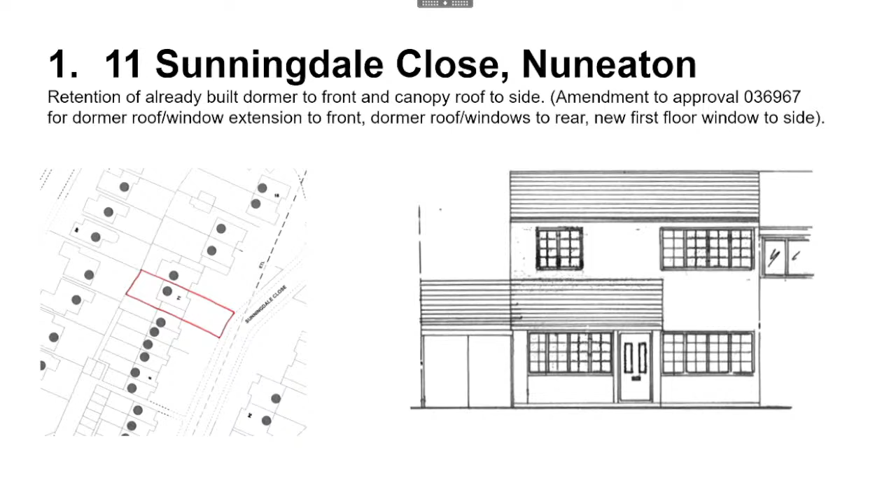The amendments are, in terms of the front dormer: this has been built 20 centimetres higher and 35 centimetres wider than the previously approved dormer. A canopy roof was added to continue the existing canopy roof across the front over the existing carport. That element wasn't shown on the original application.

The application was deferred at committee on the 7th of September in order for members to carry out a site visit to assess the impact of the dormer and canopy roof on the street scene, and that was carried out earlier this afternoon. Objections have been raised, citing issues such as the property no longer being in keeping with the area, with larger windows and being finished partly in render.

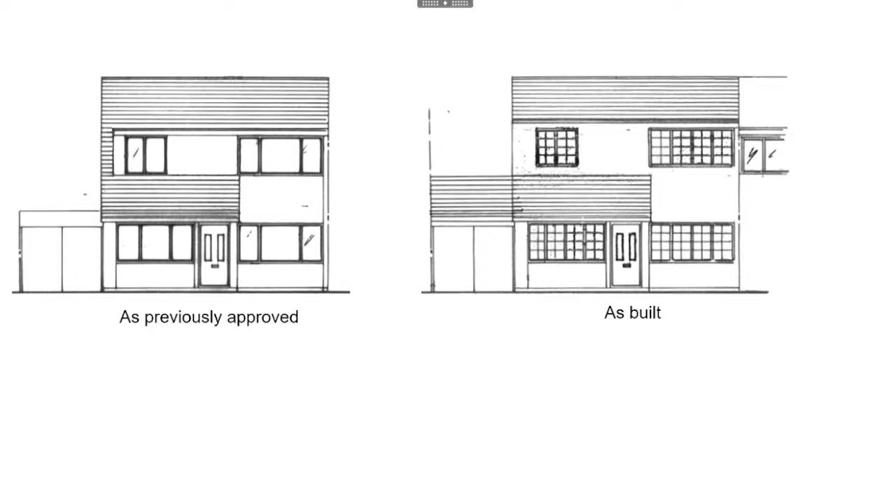In terms of the impact on visual amenity, both elements are visible from the street. The overall increase in the size of the dormer from that originally approved is comparatively small. The dormer is set below the existing ridgeline of the main house, and the property is set back from the footpath by approximately 13 metres. The canopy roof is a continuation of the original. As there is a mixture of house styles in the street, officers consider that it would be unreasonable to refuse

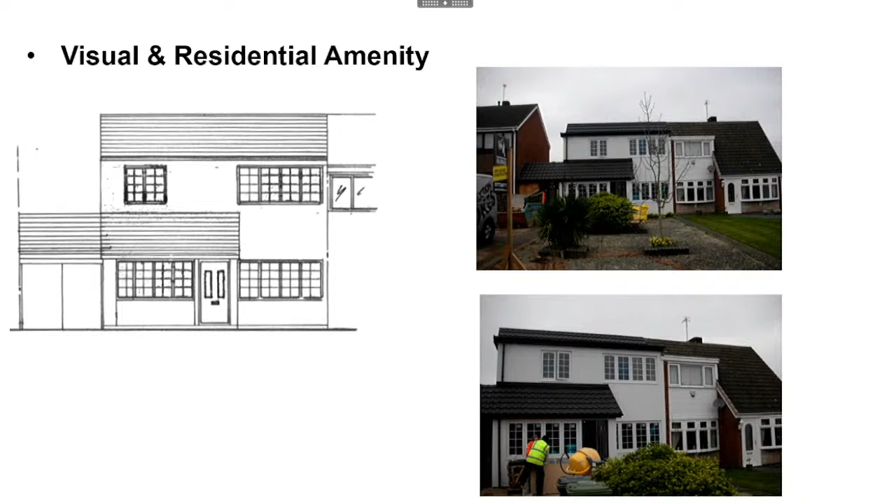the application on visual amenity grounds. In relation to the impact on residential amenity, as the dormer and canopy roof are to the front, only the neighbouring properties either side, which are numbers 10 and 12, are likely to be impacted on. Neither element infringes either the 45 or 60-degree guideline from the centre of any front-facing windows of habitable rooms, and

therefore it is considered there is no detrimental impact on neighbouring properties. It is therefore considered that the proposal is acceptable in terms of visual and residential amenity, and the recommendation is one of approval. Thank you, Chair.

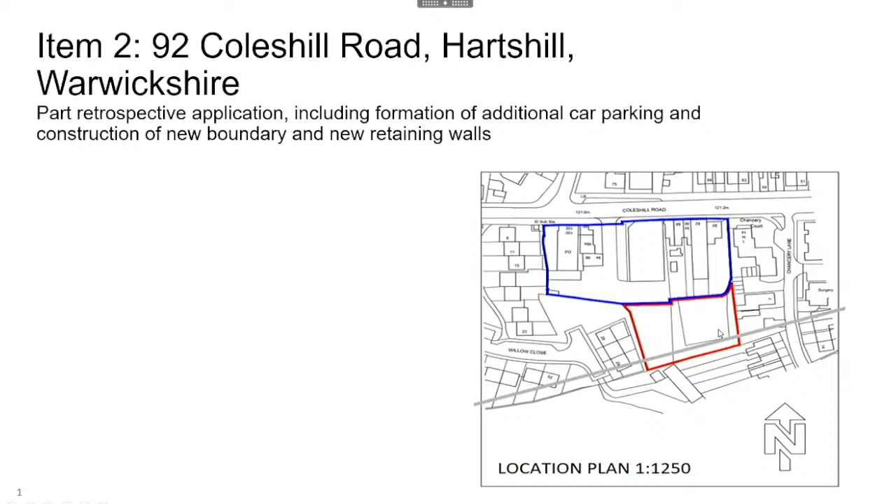The key issues to assess in this consideration of this application are the principle of the development, the impact on residential amenity, the impact on visual amenity, flooding and drainage, and the impact on highway safety.

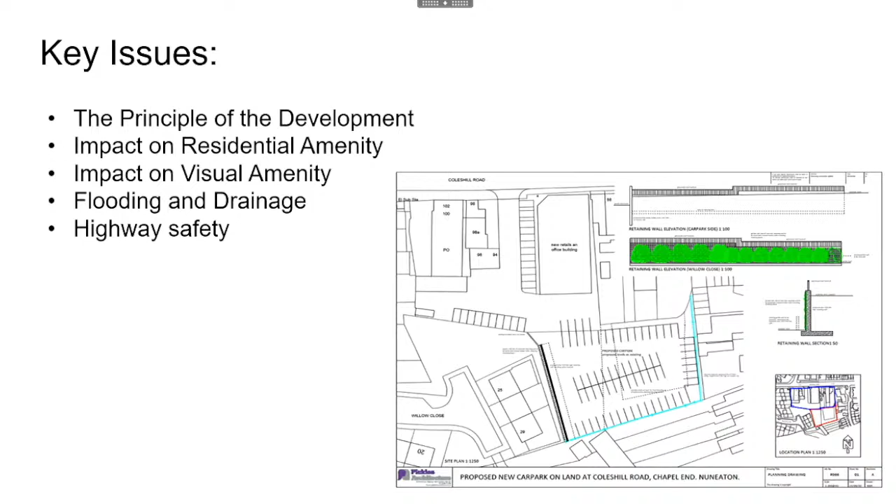Just to be clear, the majority of this development is not within our area, and just the southern tip of the site is. A lot of the works have already been carried out, with some of the works being proposed and continuing to be built. The proposed end use of the portion within NBBC's area is as a car parking area. The boundary wall and fencing are ancillary to this use, and therefore the principle, at least, of the proposal is acceptable.

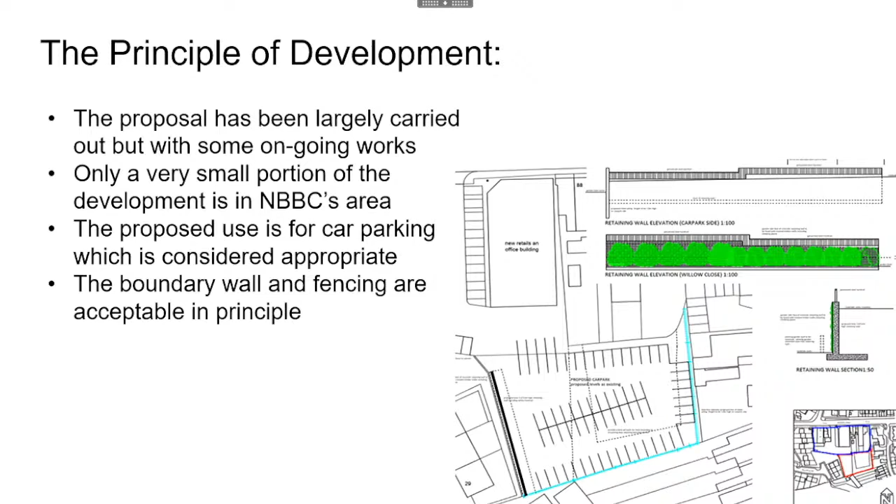The land levels have been raised by around 2 metres, and there is a further 2.4 metre fence on top of that. 11 Chancery Lane is the property which has its rear garden running parallel to the new boundary fence. The fence will provide some privacy and will help to mitigate any noise issues created by the car park, but will have a significant enclosing effect on the rear garden of Chancery Lane.

There are lighting columns also proposed, and a condition has been recommended by Environmental Health to cover these. On balance though, given the open aspects to the garden, the harm to the private rear garden of this Chancery Lane property is considered not to be so significant so as to warrant refusal.

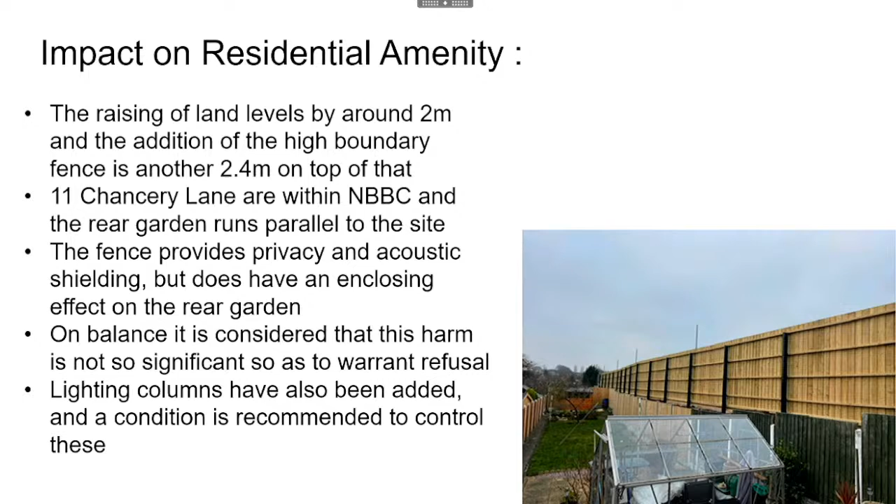The new boundaries are concrete retaining walls with high, close-boarded wooden fences. The large wooden fences are highly noticeable from the rear gardens on Chancery Lane. There is some harm to visual amenity of this part of the borough as a result of the works. However, this harm is isolated to only small parts of the public realm, with private gardens mostly affected. However, it is not considered that this harm is so severe so as to warrant refusal.

In regard to the impact on flooding, which was raised by some objectors, the majority of the site is within North Warwickshire, and very little of the built form is in our area. It is not within NBBC's area, but large surface water storage tanks have been installed within North Warwickshire's part of the site, which they considered to be acceptable. It is considered that the part of the site on us will have no significant adverse effect on flooding or surface water drainage.

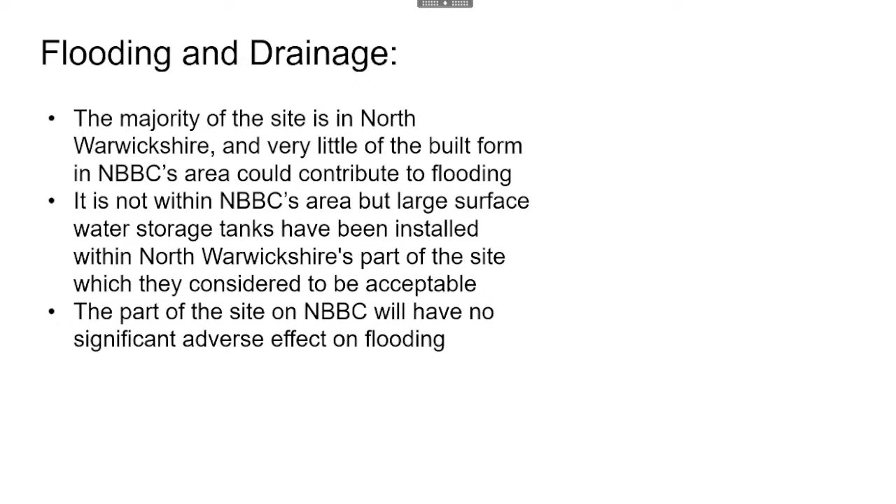The access and manoeuvring space to the site is all within North Warwickshire's area. Warwickshire County Council highways were consulted on the scheme, and they have no objection subject to some conditions. Additionally, on the larger part of the site, North Warwickshire required a road safety audit to be submitted before the approval of the scheme.

This was submitted and scrutinised by Warwickshire County Council and deemed acceptable by North Warwickshire. It is considered that the harm to highway safety caused by the development within this borough is minimal and is acceptable with the conditions proposed. In conclusion, and on balance, the development is considered to be acceptable. Thank you, Chair.

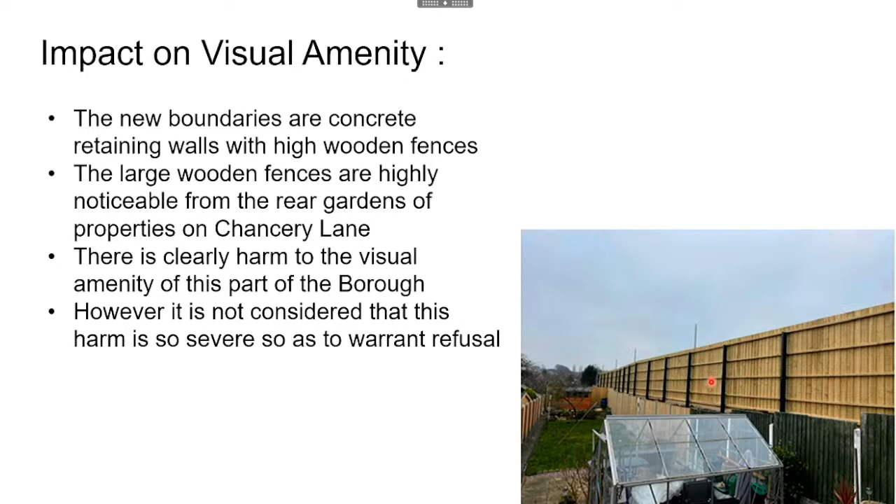Yeah, that's absolutely fine. I'll just change my pointer. This part of the site is on Nuneaton and Bedworth Borough Council. The boundary runs roughly parallel to the southern boundary of the site, which hopefully you can see there. As I move back through the slides, this fence is that southern boundary that I just highlighted. So hopefully that's answered the question, Councillor, and hopefully that's clearer. Thank you, Chair. Thank you.

Councillor Evans. Thank you, Chair. I just wanted to ask a question in relation to Schedule 4 about the car park not being used after 10:30 in the evening. How would we enforce that as a planning authority? Because I don't see a condition in there that some sort of barrier is put in place, like a gate that the future facility would put down after 10:30. So it would still be an open car park, surely.

That's correct, Chair. The actual access to the site isn't on us, so we couldn't enforce any condition that was for a barrier or related to the access. The use of the car parking that's on us is proposed to be limited by conditions, and that would be down to basically it being used outside of those hours, which is a breach of condition, which we could then investigate should enforcement complaints be raised. But there would be no physical barrier that we could place on that site.

Thank you. Councillor, does that answer your question? Yeah. So you say we can't put a condition in place that we mandate the applicant to put a gate or barrier in place to operate between 10:30 and 6:30. Is that what you're saying? Yeah.

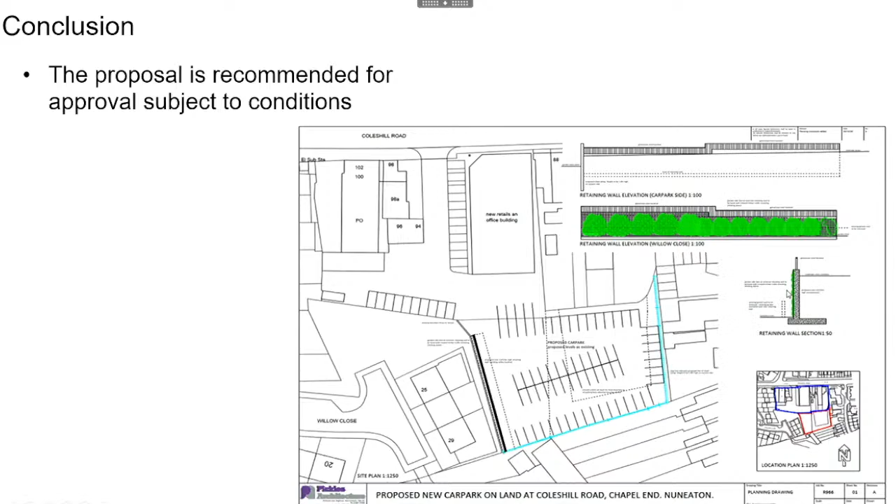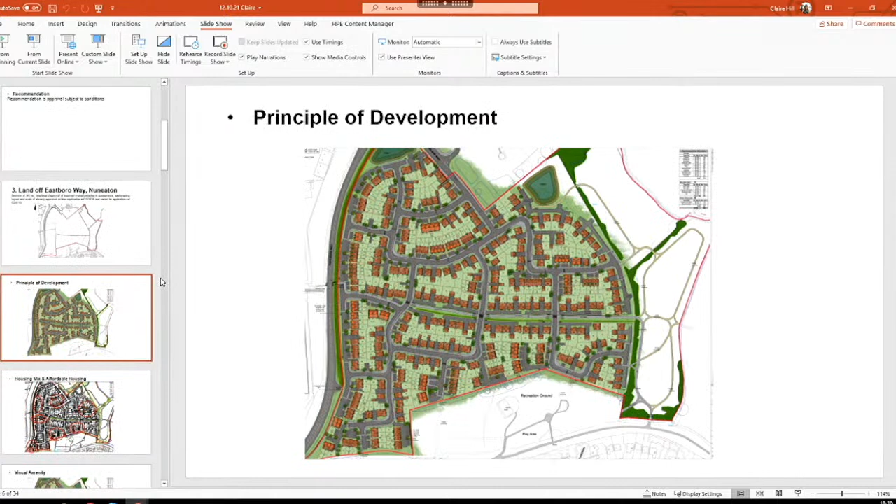Okay, so we'll move now to agenda item number 3. I understand we've got several speakers, so just before we start, I will remind speakers that once the presentation is over, you'll be allowed 3 minutes to make your point. That will be timed. We've got several speakers, I think 2 of them are statements which will be read out by Mr. Richardson, and then we've got a speaker on behalf of the applicants. Claire, whenever you're ready.

This application is for approval of reserved matters for the erection of 360 dwellings relating to appearance, landscaping, layout and scale of an already approved outline application. The outline application established the acceptability of the principle of the development, and this current application deals with the details of the scheme. A mixture of 1 to 5 bedroom properties are proposed, including affordable housing. Public open space and infrastructure such as footpaths and cycleways are also proposed.

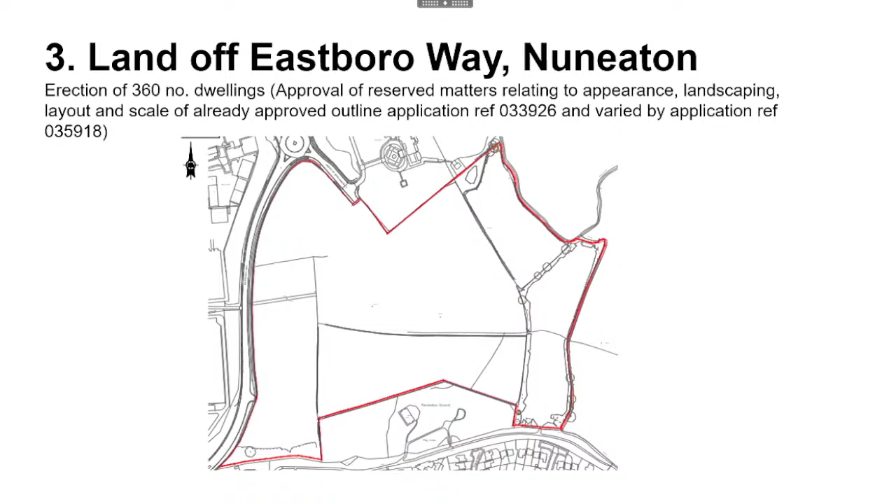Objections have been received as detailed on the agenda, raising points such as increased traffic and congestion and the need for sufficient pedestrian and cycle routes. 2 letters of support have also been received. Notwithstanding the comments received, the application is also being reported to committee at the request of Councillor Kondakor.

In terms of the principle of the development, this has been established through approval of the outline application. Policy DS2 of the Borough Plan sets out the hierarchy and roles for each settlement in the borough, with Nuneaton having the primary role for employment, housing, leisure and service provision. Policy DS5 of the Borough Plan refers to a number of sites that will be allocated for residential development and associated infrastructure, and this application forms part of allocation HSG 10.

This sets out the key development principles and expected form of development. Officers consider that the requirements of policy HSG 10 have been accommodated on the site. An illustrative master plan was submitted with the outline application, and it is considered that the reserved matters is in general accordance with that.

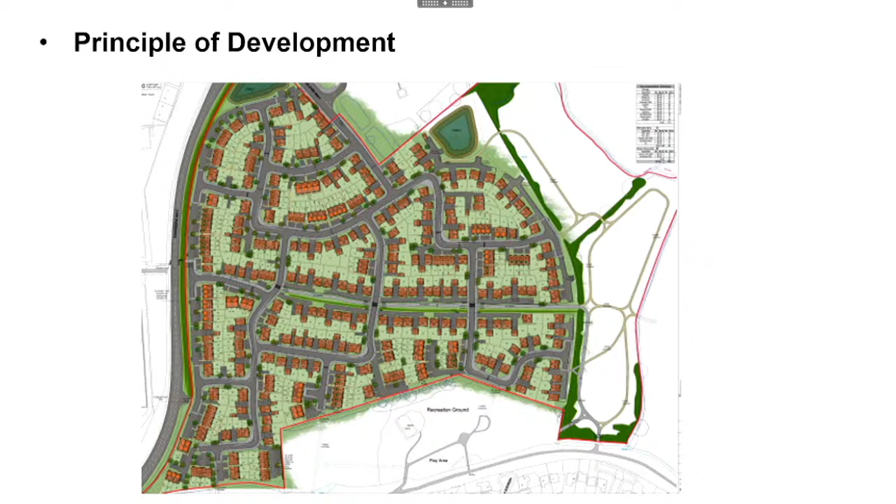In relation to housing mix and housing needs, including affordable housing, Policy H2 of the Borough Plan requires 25% of all new developments to be affordable on sites of 15 dwellings or more. A total of 90 affordable units are proposed, which equates to 25% and is therefore acceptable. Of the affordable units, 24 are 1 bed, 40 are 2 bed, 20 are 3 bed and 6 are 4 bed. The housing team have confirmed they have no objection to this mix. The Affordable Housing SPD recommends a split of 74% social affordable rent to 26% intermediate housing mix.

The proposed tenure split is 73% affordable rented and 27% shared ownership. Planning policy have confirmed that as this is close to the requirement, it is considered acceptable.

The Affordable Housing SPD states that to promote inclusive communities, affordable housing should not be identifiable from other forms of housing within a housing development. It should not be located in the least desirable areas of the site, but distributed evenly amongst market housing.

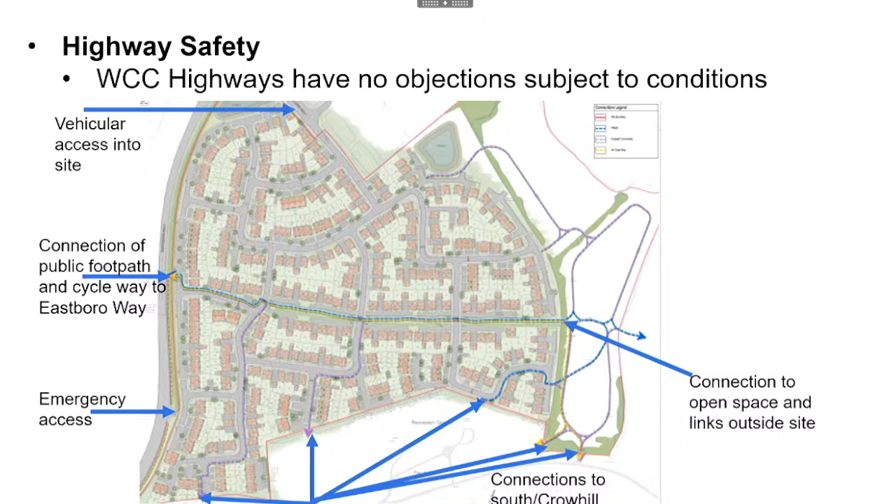In relation to flooding and drainage, the majority of the site is within flood zone 1. The north-east part of the site is located within flood zones 2 and 3, with the River Anker and a small tributary watercourse adjoining the site. As the built development will be entirely within flood zone 1, the Environment Agency do not have any objection.

In terms of surface water drainage, as per the outline application, sustainable urban drainage systems are proposed, one to the north-east and one to the north-west, together with supplementary attenuation tanks. There is a condition on the outline permission that requires full details of the foul and surface water drainage schemes to be submitted for approval.

Revised surface water drainage calculations have been submitted, which the County Flood Risk Team have confirmed are acceptable.

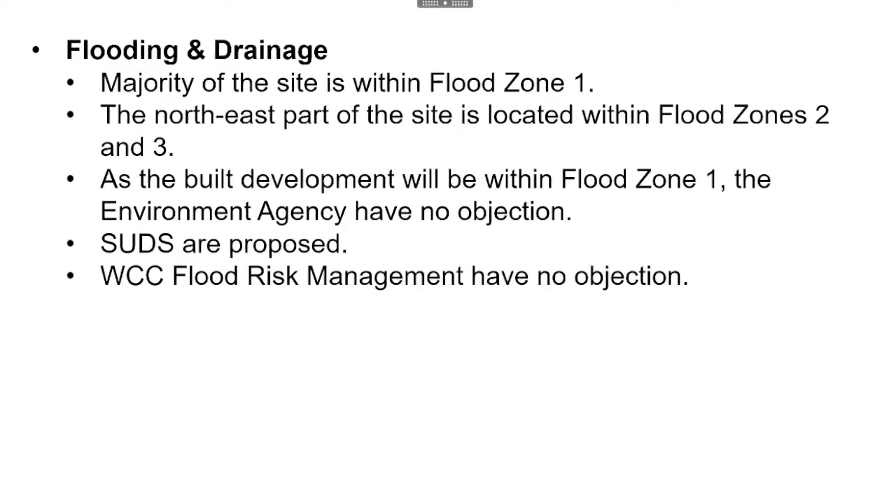In terms of ecology and biodiversity, the new public open space to be provided within the site will retain the existing grassland, hedgerow and tree features and will include meadow grassland and an enhanced ecological area towards the northern end with additional planting. A wet grass mix is also proposed to the very northern end of the open space.

Three scrapes are proposed to the northern meadow area. These are shallow ponds which hold rain or flood water seasonally and which remain damp for much of the year. They have gently sloping edges which create obvious water features in fields and can make a significant difference to wildlife.

Condition E has been added for further details of these to be submitted. The Parks team have also requested a condition for details to be submitted of how the SUDS basins are to maximise their benefit for wildlife. This is covered in condition C.

An arboricultural method statement has been submitted for the application. This identifies that the majority of the existing trees and hedges would be retained. Some trees are proposed to be removed from the southwest corner of the site and other parts of the site to allow for footpath connectivity. The majority of these are category C and are of lower quality.

The loss of some existing trees is mitigated by a new planting scheme. A new length of native hedgerow is proposed to the front of plots 296 to 298 to the south of the site.

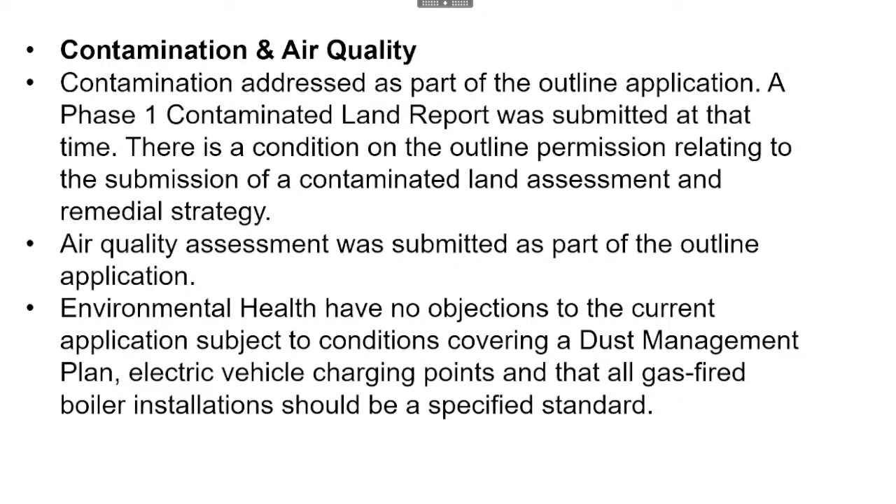Since the production of that report and determining the outline application, an air quality SPD has been adopted by the Council. Environmental Health have no objections to the current application, but have requested conditions covering a dust management plan, electric vehicle charging points, and that all gas-fired boiler installations should be to a specified standard.

In conclusion, the site is allocated as a strategic housing site in the Borough Plan and will provide housing and other social and leisure facilities. The potential impacts of the development in relation to residential amenity, visual amenity, highway safety, flood risk and drainage, contamination, air quality and ecology have all been considered.

The assessment has subsequently shown there will be no adverse impacts in some instances. Where there are potential adverse impacts, it would be possible to mitigate these through the use of conditions. The recommendation is therefore approval, subject to conditions, as detailed on the agenda and addendum.

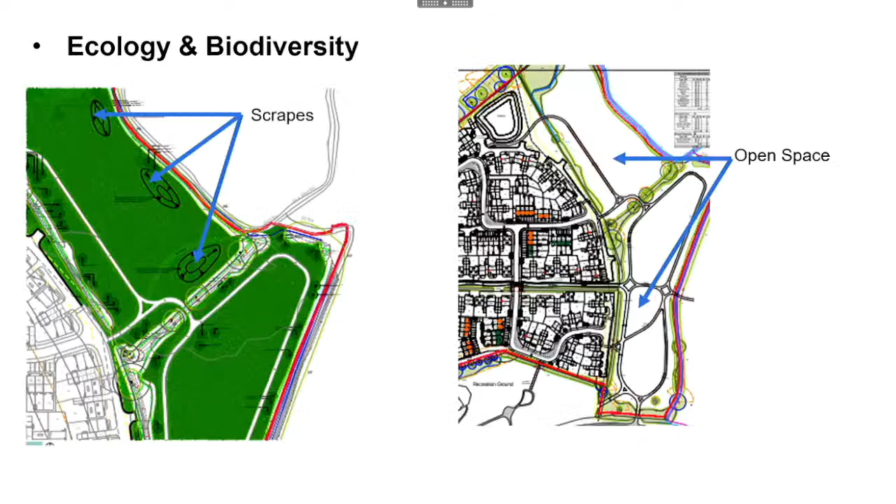The distance standards within the residential amenity for a new site, there's nothing on there. I would have thought a little bit more thought would have gone into ensuring the houses aren't overlooked. You know, they've got French windows in so people can see past them. I mean, it's a real blank canvas and a really good opportunity to make a really good housing estate. And I really don't think it fits my criteria for that at all.

I am unhappy about how the pepper potting hasn't been done. And in terms of only 119 houses out of 360 will be built so that they can be used for lifetime or used for adaptations, I don't know whether the officer knows how many of those that are in the affordable category fall into that 119. So if the officer could maybe find that out for me, that'd be useful.

And it just doesn't sit right with me. I think it's badly designed, and at this moment in time, I will listen to the debate. I haven't made my mind up. Thank you, Chair. Okay, thank you, Councillor Shepherd. Councillor Wilson.

Thank you, Chair. This is in my ward, so it's only appropriate, I think, that I get a chance to comment. I've never really liked the principle of having development on this site, but it was put in there under the previous administration with the borough plan. It was passed by the inspector, and a previous planning committee before May, I think it was 2018.

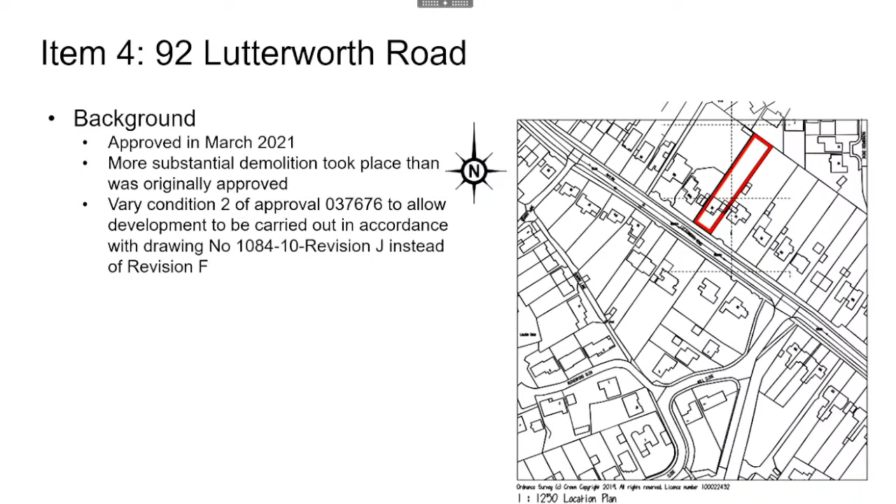The two key issues to consider are the impact on visual amenity and the impact on residential amenity. The proposal will be visible within the street scene of Lutterworth Road. The front elevation is set back from the footpath, consistent with its neighbouring houses. The design reflects the traditional style of the area and features a hipped roof with painted render finish. This replicates the overall style and size of that already previously approved.

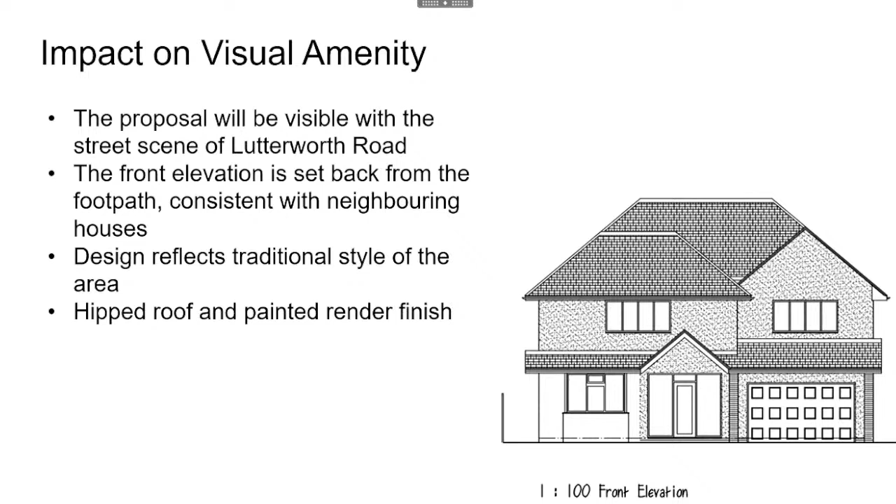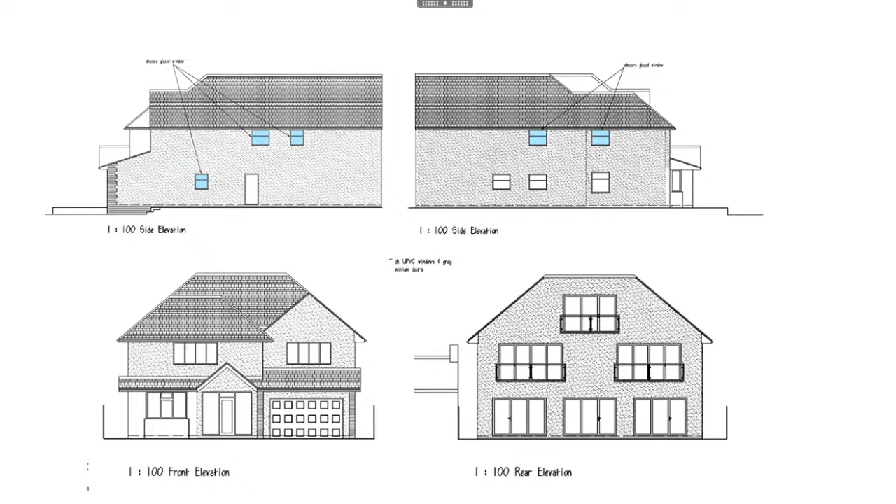Here are the elevations. Members will note that the majority of the building will be new, so to speak, with only a small bit of the original dwelling remaining, and essentially that's the crux of why this application is being made. But these elevations are identical to those previously approved.

The proposal property has two other houses either side, 94 Lutterworth Road to the southeast and 90a Lutterworth Road to the northwest, with number 9 Leam Close to the rear of the site. The proposal has been assessed against the adopted Sustainable Design and Construction SPD, and overall it is considered there will be no unacceptable harm on residential amenity.

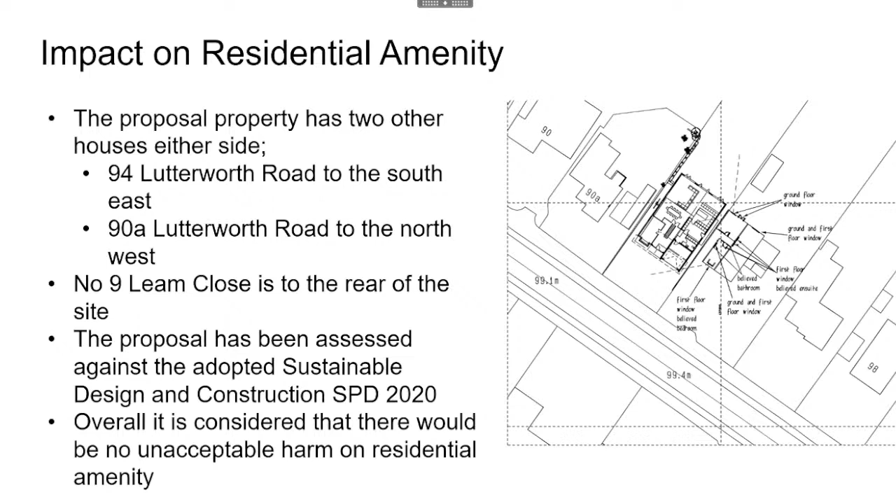The two key issues are visual amenity and residential amenity, and overall it is considered that there will be no unacceptable harm to either of these caused by the development. The recommendation is therefore one of approval, subject to conditions. Thanks, Chair.

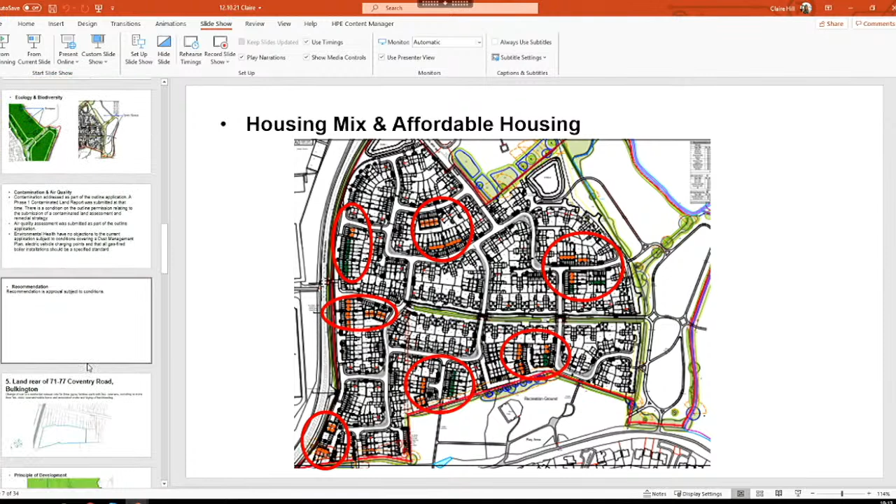This application is for a change of use to a residential caravan site for 3 Gypsy families with 2 caravans on each pitch. These would include no more than 1 static caravan and associated works and laying of hard standing. Objections have been received as detailed on the agenda, raising issues such as inappropriate development in the green belt, loss of openness in the green belt, loss of privacy, increased noise and impact on highway safety.

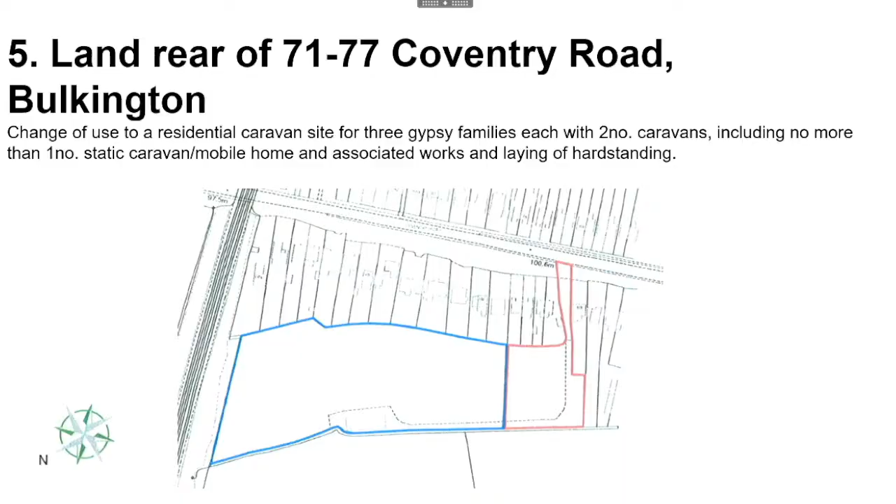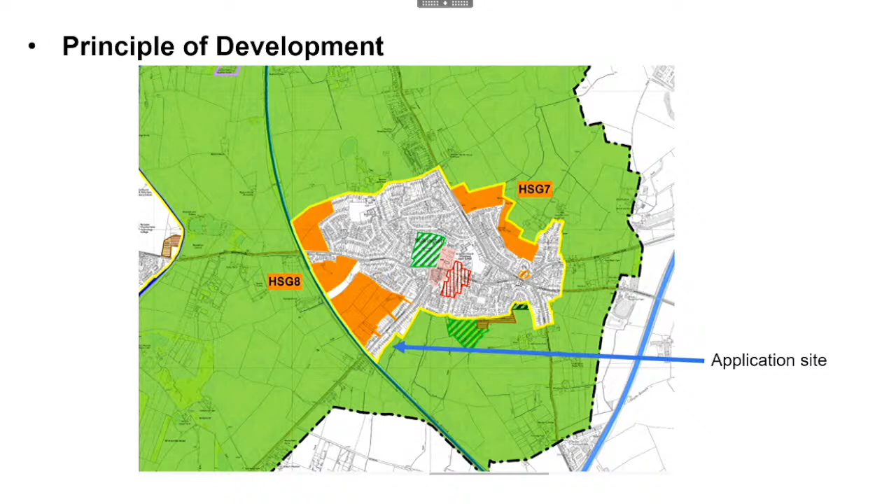In terms of the principle of development, policy DS3 of the Borough Plan states that development outside settlement boundaries is limited to agriculture, forestry, leisure and other uses that can be demonstrated to require a location outside of settlement boundary. This site is not within a defined settlement boundary as shown yellow on the plan green, and therefore it is not considered that the principle of the development is acceptable.

The application site lies within the West Midlands Green Belt, where in line with paragraphs 147 and 149 of the NPPF, policy DS7 of the Borough Plan makes it clear that there is a general presumption against inappropriate development, which, by definition, is harmful to the green belt. Paragraph 150 of the NPPF sets out certain types of development which are acceptable within the green belt, with paragraph 149 stating that new buildings within the green belt are inappropriate, except in certain circumstances.

The proposed change of use of the land to a residential caravan site does not fall within any of the exemptions outlined in these policies, and is therefore a form of inappropriate development. This inappropriateness is also reiterated in paragraph 16 of planning policy for traveller sites. The development should therefore not be approved except in very special circumstances, and substantial weight should be given to any harm to the green belt by reason of inappropriateness.

In terms of the impact on the openness of the green belt, paragraph 137 of the NPPF states that the fundamental aim of green belt policy is to prevent urban sprawl by keeping land permanently open, and that the essential characteristics of green belts are their openness and permanence. The site is ultimately an open area of green space field bounded by mature hedging in part to the rear of the existing established residential rear private gardens of properties along Coventry Road.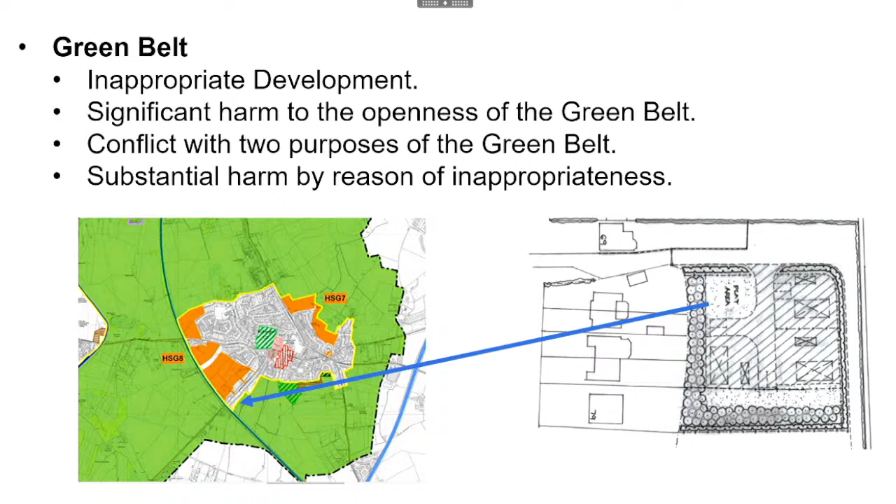Paragraph 148 of the NPPF states that when considering any planning application, local planning authorities should ensure that substantial weight is given to any harm to the green belt. Very special circumstances will not exist unless the potential harm to the green belt, by reason of inappropriateness, and any other harm is clearly outweighed by other considerations.

In this case, some considerations have been put forward by the agent, which they believe amount to very special circumstances which outweigh the harm to the green belt. These will be covered in turn next.

The first is unmet need. Planning policy for traveller sites requires local authorities to consider the existing level of provision and need for sites, and that local authorities should identify and update annually a supply of specific deliverable sites sufficient to provide...

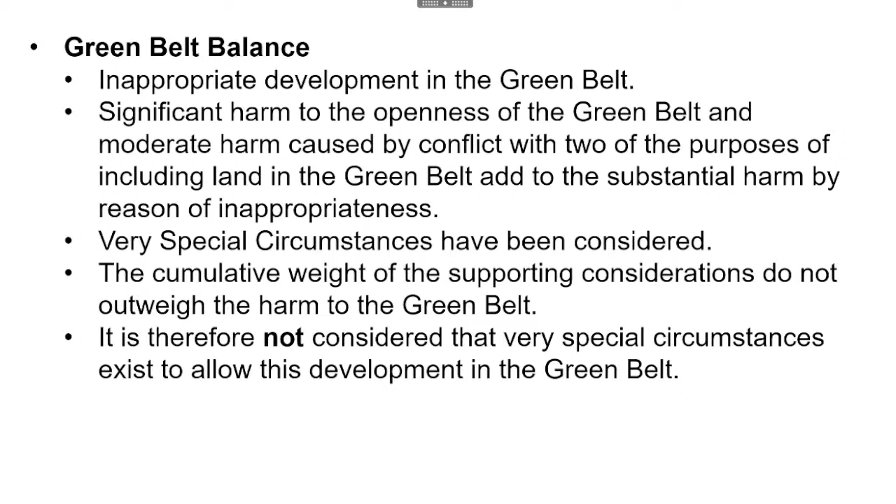However, whilst the best interests of the children are a primary consideration, officers don't consider they are a determining factor. The cumulative weight of the supporting considerations do not outweigh the harm to the greenbelt, and therefore it is not considered that very special circumstances exist to allow this development in the greenbelt.

Turning to residential amenity, the rear of numbers 71 to 77 Coventry Road are the closest properties to the site. A static caravan is proposed to the western part of the site, which would be sited approximately 30 metres away, which does comply with distance standards. It is therefore not considered that there will be any significant overlooking from and to the site.

Environmental Health have been consulted but have not responded. However, they had no objections in relation to the impact on surrounding properties to the previous application, which was for the creation of 3 residential units. They also stated that as the site is approximately 250 metres from the railway and set well back from the road, they were not concerned about noise impacting the site.

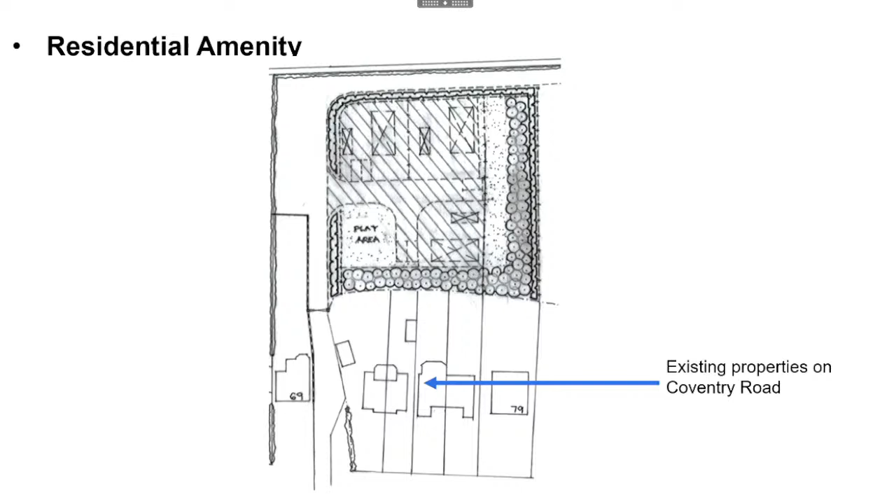In relation to visual amenity, the NPPF states that planning policies and decisions should ensure that developments are sympathetic to local character and history, including the surrounding built environment and landscape setting. Policy BE3 of the Borough Plan states that all development proposals must contribute to local distinctiveness and character.

The site is located to the rear of properties fronting Coventry Road, which is currently of a uniform linear formation, which would be considered ribbon development. The caravan site will be located to the rear of the properties and therefore constitute backland development. Officers consider that the proposed development would depart from the existing characteristics of the area, street scene and built form, contrary to the visual amenities of the area.

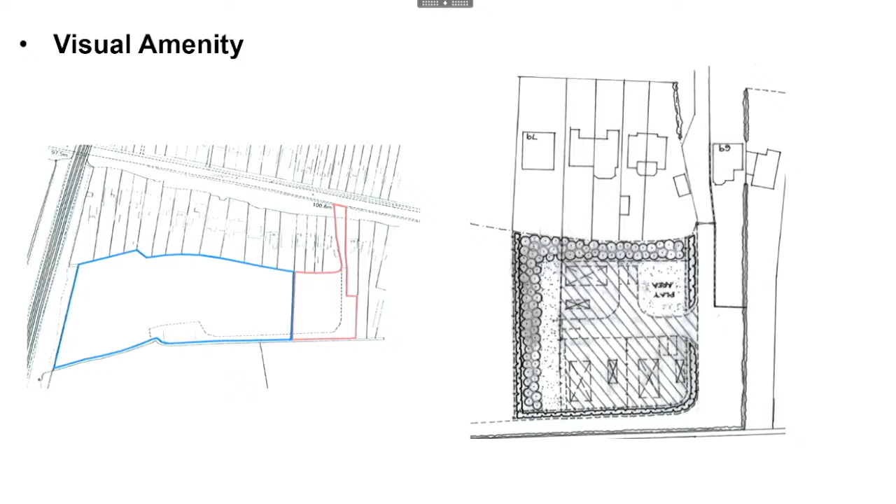In terms of highway safety, the NPPF states that it should be ensured that safe and suitable access to the site can be achieved. Access is proposed off Coventry Road between numbers 69 and 71. County highways have no objection, subject to conditions.

In relation to flooding, the site is within flood zone 1, which has the lowest possibility of flooding, and drainage details could be secured through a condition.

In terms of archaeology, it would appear that the proposal may have an impact upon a small area of ridge and furrow. However, this is a small part of what itself is a relatively small and isolated fragment of ridge and furrow. Warwickshire County Council Archaeology have been consulted and stated that some of the hard standing that was previously laid would have had some impact on the surviving earthworks. However, there is very little in terms of what is known about the archaeological sites and the surrounding area, and this proposal is unlikely to have significant impacts, and therefore they have no objection.

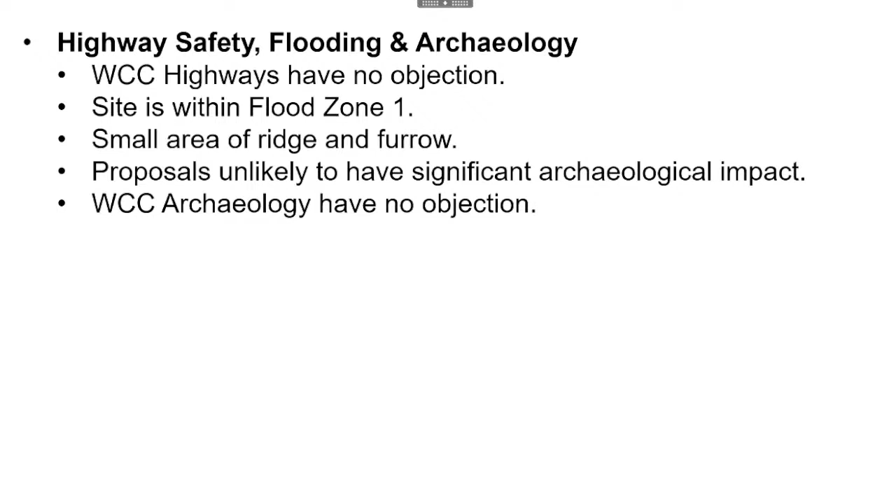In conclusion, the proposed development is a form of inappropriate development in the greenbelt. Development should therefore not be approved without very special circumstances. It is considered that the significant harm to the openness of the greenbelt and the moderate harm of conflict caused by the conflict of two of the purposes add to the substantial harm by reason of inappropriateness.

Very special circumstances should be demonstrated to justify the inappropriate development. In this respect, the very special circumstances are unmet need, lack of accommodation, compliance with policy, and the personal circumstances of the occupants.

The cumulative weight of the supporting considerations do not outweigh the harm to the greenbelt. It is therefore not considered that very special circumstances exist to allow development in the greenbelt. In addition, the site is outside a recognised settlement boundary and will depart from the existing linear form of development. The recommendation is therefore refusal as detailed on the agenda.

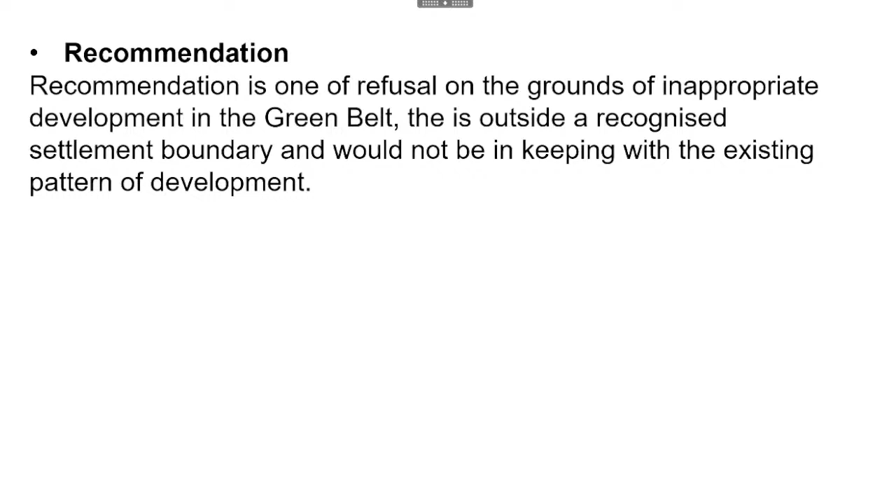So I do understand that. But could you tell me, please, when you were just on about the property and building down Coventry Road, you said I got full planning permission 3 years ago for that land where I'm building the houses. Didn't you realise that?

Mr. Smith, I'm not at liberty to discuss this further, because we've finished the item now. But if you put things in writing to the council, if you're not happy with anything, or if you want to go to appeal, you're more than welcome to do so. It's your prerogative. So I'm sorry, I'm not discussing this item any further, Mr. Smith.

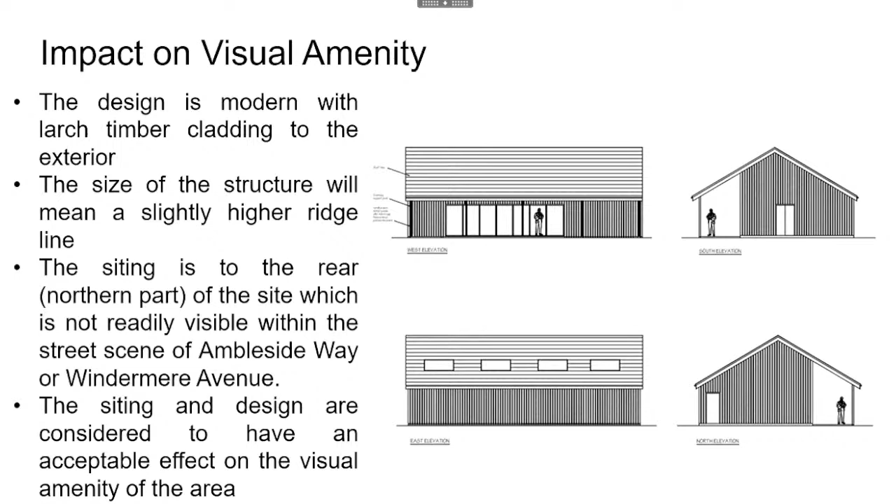The pavilion is to be sited around 40 metres from the nearest residential garden. Because of this siting away from gardens, there are no concerns over the loss of light or privacy. There are some roof light windows in the rear roof slope, but again this will meet distance standards given the distances involved. Environmental Health have requested a condition to prevent amplified sound, which will be added to any approval and is on the agenda.

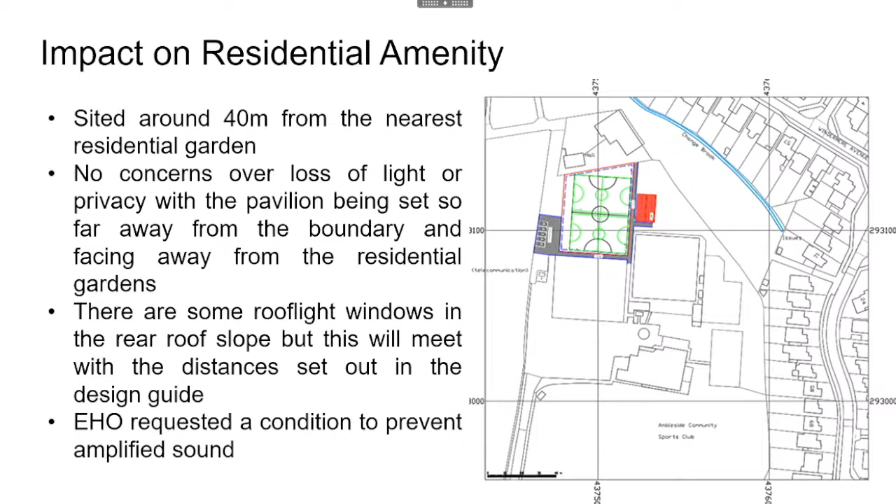Thank you, Chair. Thank you very much. I have one speaker on this item, that's Councillor Tromans, I believe. Oh, sorry, my apologies, and Mr. Carr. I think it's conventional that we go with you. You're indicated first, Councillor Tromans, then we'll go to Mr. Carr.

Thank you very much, Chair. I'm speaking as ward councillor, not as an objector or as a supporter, but just reflecting the comments I've had from both the applicant and the residents. Ambleside is a very valuable amenity in Nuneaton and across the whole borough. They get users from everywhere, in Bedworth, Bulkington and Nuneaton. In our area, with all the expansion we're having with new homes, it's very, very needed.

I can well understand that they want to improve the amenities there. And the design of the pavilion itself seems to be very modest and in keeping, and has been deliberately done so that it won't cause problems to the local residents. I'm glad that Ambleside are considering these things.

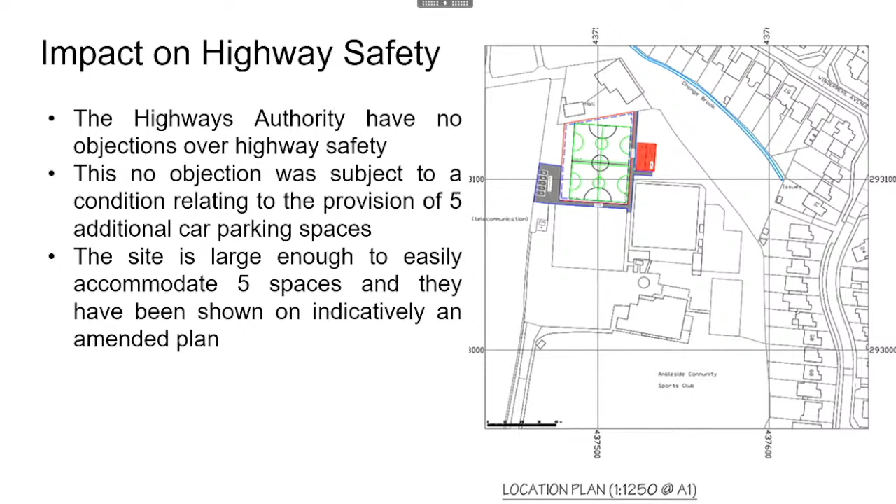We're going to have an improved amenity there at Ambleside, which is very welcome, and I think we would also be doing right by the residents, and they would be being good neighbours by putting up the acoustic boarding, the other side of which there'll be a bit of a hedge just down the slope, so that will break up the impact of the boarding.

So actually it will look quite nice from residents' back gardens, and they won't be disturbed by direct noise that in some places isn't really any further apart than the width of this room. So thank you, that's all I wanted to say, Chair.

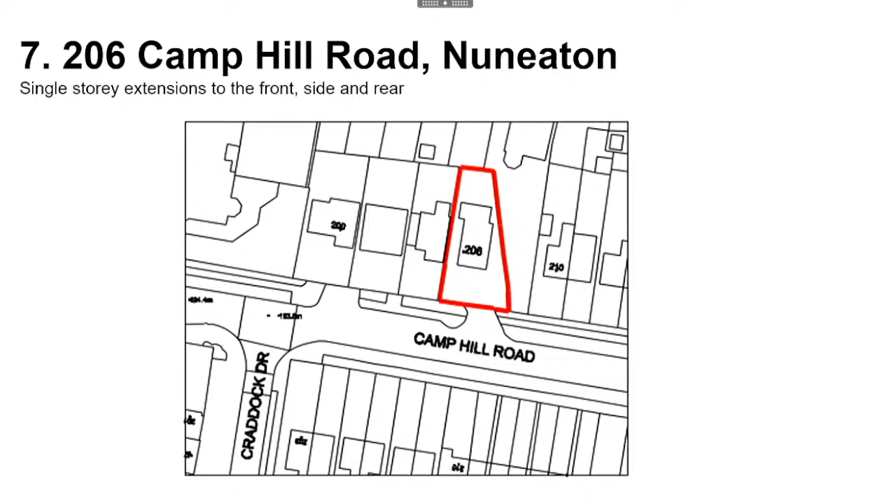In terms of residential amenity, there are a number of properties that surround the site. In terms of number 204 Camp Hill Road, the proposed single-storey side extension appears to be proposed up to the boundary with that property. The gutter detailing has been amended to show this is a parapet wall, so it does not overhang this neighbouring property. The only window to the side of this neighbour is to a landing, which is not protected. The neighbour has raised concerns as the gap to the side of this neighbour is relatively small, and they have meter cupboards and utilities on this side of their property. So access would be required. However, this is not a planning issue. It is considered that this side extension would not affect any front or rear windows or their private amenity space.

At the moment, the current single-storey rear extension to the dentist projects slightly further than that neighbour's conservatory - that's the extension there that's existing. The proposed single-storey rear extension is to project to a further depth of 3.1 metres. However, as it will be set off the boundary by 4.5 metres, this is considered acceptable.

In terms of the impact of number 6, the single-storey side extension will be 26 metres from the rear windows of this property, which complies with distance standards. In relation to the rear extension, this is only slightly in line with this neighbour's property and is approximately 19.5 metres away from their windows. The windows to the proposed staff room have now been removed, so that the distance to this neighbour's rear windows is considered acceptable.

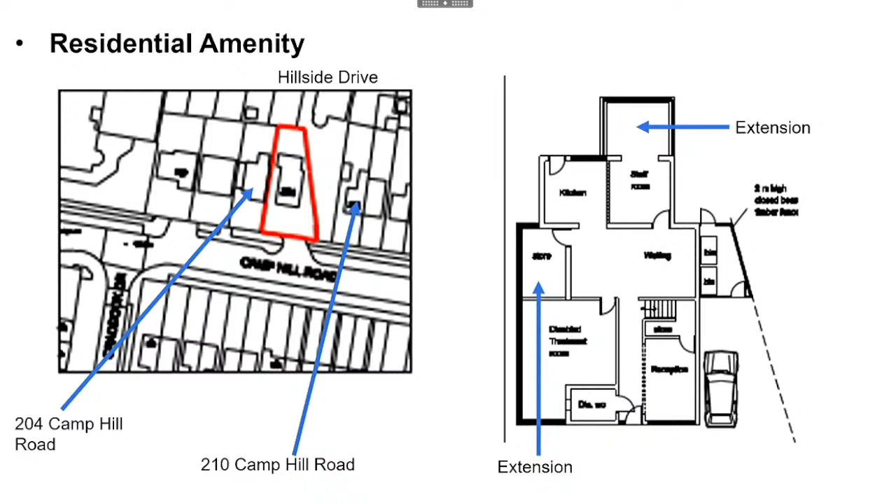In relation to ancillary equipment and refuse facilities, there are already 3 extraction units on the sides of the buildings and 1 to the rear. In addition, there is a compressor unit facing the side of 204, which would have to be removed if the side extension was approved. Environmental Health have concerns that the current acoustic treatment to this is likely to be inadequate. However, only the plant required for the new rooms or those to be removed as part of this application can be considered as part of this current application.

Environmental Health have no objection providing there is no new outside plant, including any new air conditioning units. The agent has assured the council that any new plant will be internally fitted, including the new compressor. Condition 6 has been added to ensure that no external plant is installed and to ensure any new plant is acceptable in terms of noise to neighbouring properties.

A large refuse bin sited at the side of the property would have to be moved if the side extension is approved. The practice manager has advised that medical waste would be stored inside if the extensions are built, which is actually required by their own legislation. However, it is unclear where this will be situated, but nonetheless there will still be a need for some non-medical bins outside the property. An area for bins is shown to the side, and condition 5 has been added to control the refuse area with no further external outside storage permitted.

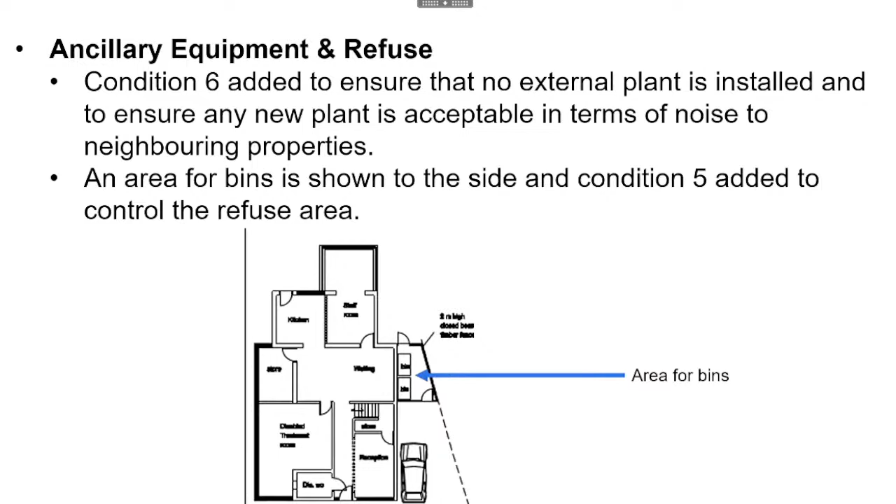In terms of visual amenity, the proposed front windows match the character of the existing, and so does the roof form, and the materials will also match. In terms of massing, it is considered that the proposals are in keeping with the property and there will be no significant visual impact from the extensions.

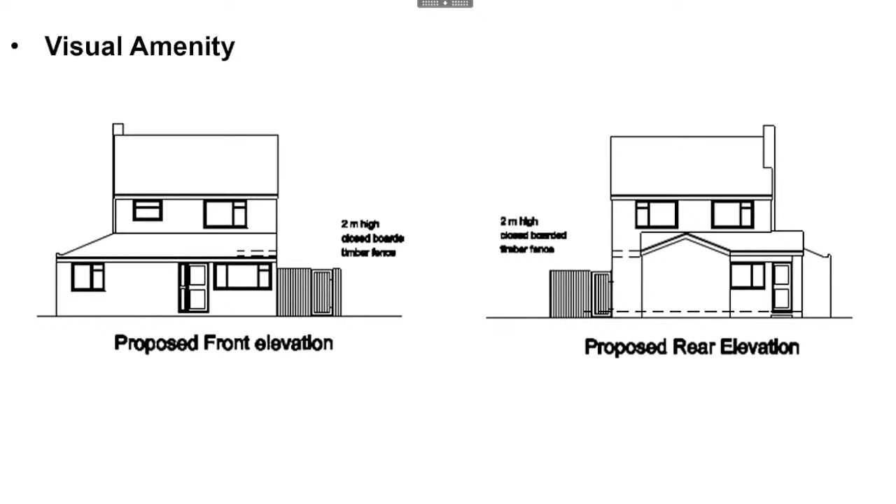In relation to highway safety, the site now only has 2 formal parking spaces and room for a car to the side of the building. There is potentially room for 2 further cars which are not marked out as spaces. There was originally an agreement in place for parking at the former public house, but no evidence has been provided to state that this is still in place. There is a small local centre on the opposite side of the road at the junction of Craddock Drive that does have some car parking spaces.

The Council's Emerging Transport Matters SPD, which contains parking standards, was previously consulted on but does not carry full weight. This states that 3 spaces per consulting or treatment room are required, which would equate to 12 spaces. County Highways have objected to the various iterations of the proposal and are still objecting to the current scheme, even though there are no new treatment rooms proposed. The grounds of objection are that the new areas are large enough to be used as new treatment rooms in the future, which would intensify the use of the site, and that details have not been provided to show where the bin and storage cage will be located, which could affect parking.

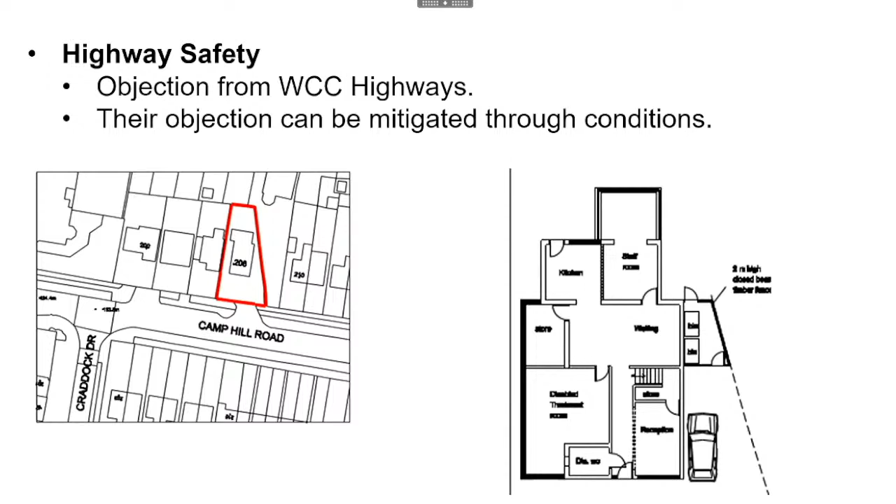To mitigate this, condition 3 has been added to ensure that there's no further treatment rooms provided, and condition 5 restricts any further outside storage. Condition 7 is also added to ensure that the parking space to the side of the building is retained in perpetuity. The recommendation is therefore approval, subject to conditions.

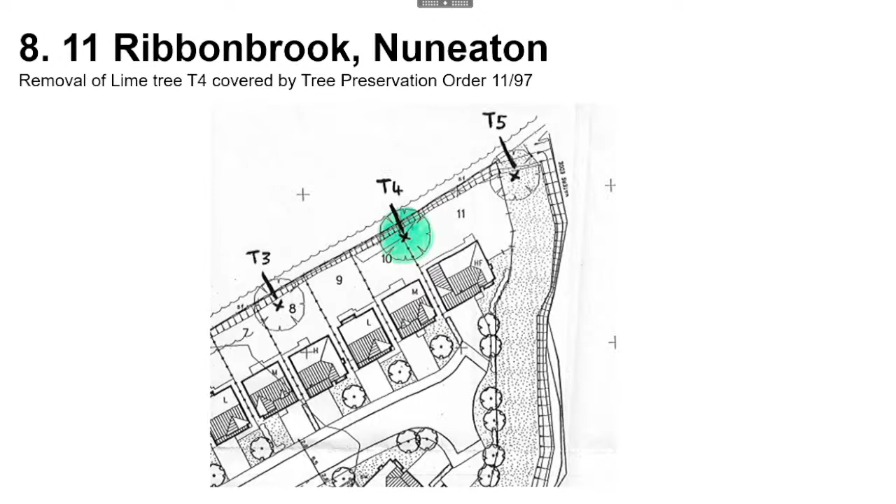Similarly, an application to fell the tree at number 6 with no replacement was taken to committee with a recommendation of refusal, but was granted by committee. However, it is not considered that a precedent for the removal of surrounding trees has been set.

Officers consider that the tree does have visual amenity value, not just to the properties on Ribbonbrook, but to the surrounding area, particularly the adjacent destination park. The view from the park is considered to break up the artificial straight lines of housing and fencing, creating a high amenity need and benefit of the remaining trees on Ribbonbrook.

The TPO was put on to protect the trees during construction of the houses on the estate, as they had significant amenity value at the time. Whilst it could be argued that loss of one individual tree may not cause significant harm, members should consider that this could set a detrimental precedent and lead the way to the loss of the whole row, which cumulatively would lead to a detriment of the overall visual amenity of the area. Therefore, the implications for the loss of this tree are wider.

If the wooded area of the railway embankment, which is outside the council's jurisdiction, was removed, and if the felling of the trees was allowed, there would be no screening for the railway.

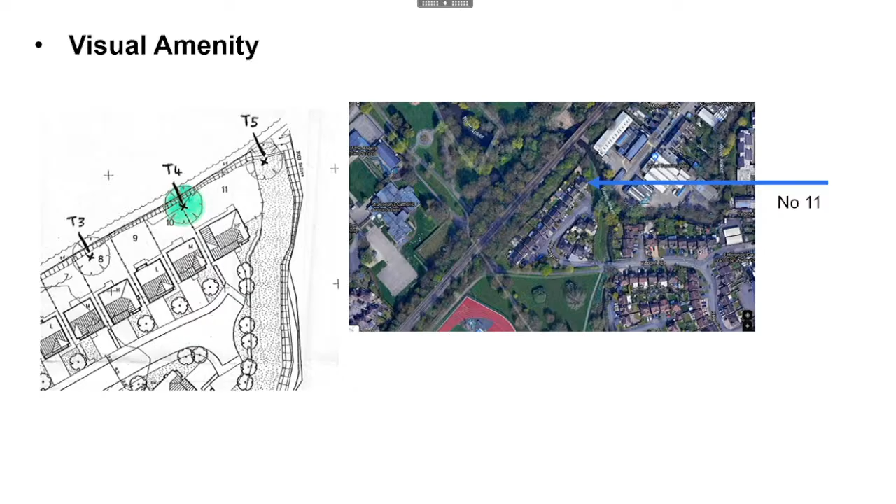The Parks Officer was consulted on the application. The recommendation received was one of refusal, as no technical evidence has been provided that justifies the removal. They state that the shading has not been shown to be extreme as the tree is situated to the northwest of the property. Aerial images show clear vegetative growth in the garden that would evidence sufficient natural light provision.

He also states that the height and size are not justifiable reasons to remove a tree without other factors being present. It has also been argued that fall from trees is a common natural phenomenon, and the Parks Officer has advised that tree removals in relation to general fall from trees would set a precedent that would undermine the TPO process.

It is considered that the tree does still hold amenity value within the area, and that removal of this tree could set a precedent for others within the row, and therefore the recommendation is one of refusal. Thank you.